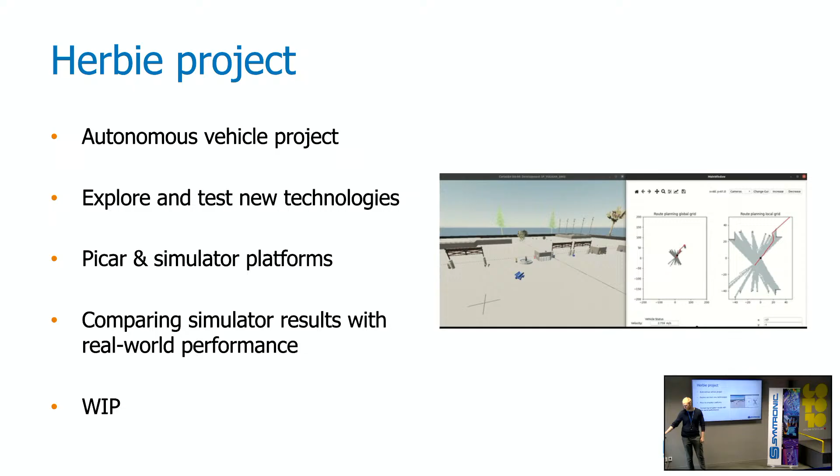So I'll do a slight overview here. We have a platform launcher where you can set the choice essentially, and we designed the project to be plug and play more or less to the specified platform you chose. We have AutoSAR standard applied as well. The platform launcher launches the different systems needed for the project - we launch a visualization package, a SLAM toolbox, a path planner, and vehicle control, among other packages that help communicate over the system. We use ROS2, and it communicates over Wi-Fi.

The Picar platform, we chose it specifically to be pretty cheap and challenging. This map is pretty challenging for the system we have. The LiDAR has a recommended minimum range of 10 centimeters, which is quite tough and challenging in this map. The vehicle dynamics with the servo we have is also quite challenging - you essentially need to max turn most of the turns to make it around. This causes us to be challenged with all the algorithms we use and really understand the methods we are applying.

When we went from the simulator and made this map and started using the hardware platform, obviously there's a lot of difficulties that arise when you have a real-time system. It arises because we had several issues - like we realized we had too low voltage because we initially had 2 batteries, and we had some sync issues as well because ROS2 is over Wi-Fi. We had to realize what message goes where, and in the simulator it was not as problematic. We found multiple issues like this, and it's interesting to see the difficulties that can arise when we go to the real world.

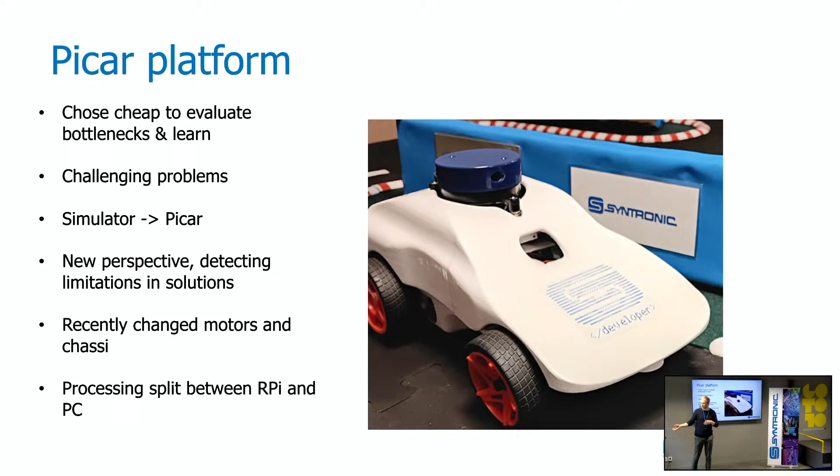The processing is split between the RPI on the car and a laptop, so we will be running it on this laptop here in the demo later. We're also using the simulator on the other side, and it's open source, based on Unreal Engine 4. We made custom maps and vehicles inside this tool.

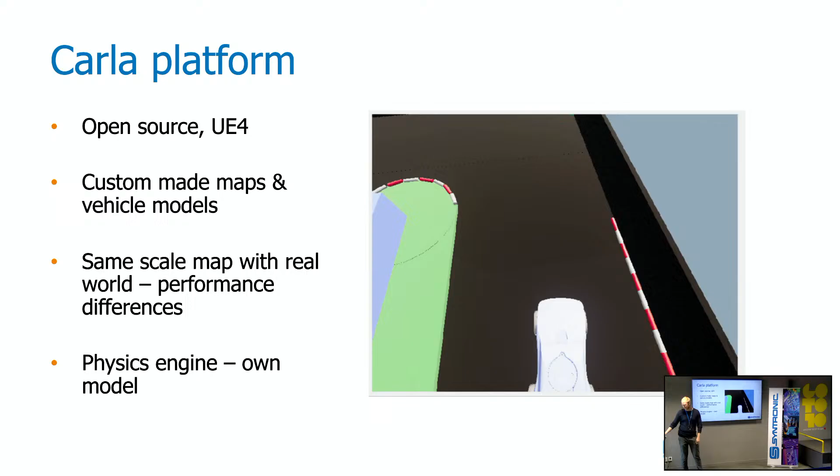We made a same scale map as this to really compare the results we see in the real world and in simulation - how much we can turn and these things, and see when the sensors are correct, or ground truth, in the simulator, how do we perform there, and we can compare these kinds of things. It was pretty fun to detect some issues - we made a model in CAD, then did animations in Blender, then exported it to Carla. It's interesting how the physics can work if you don't assign everything correctly. The first attempt was just the car flying around because the physics were not correctly set - an interesting process.

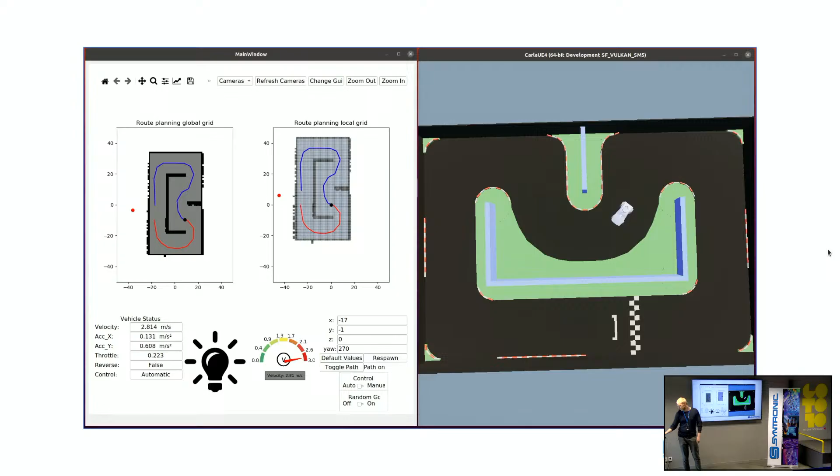So to make the map and understand the environment, we're using SLAM. SLAM involves localizing the car, and it needs the odometry to do that, so we use extended Kalman filter here, and then we do sensor fusion. We have a wheel encoder on the car that finds the small distance the car has traveled, and then we use the IMU to detect if there's a rotation happening. We fuse the 2 data and send it to the SLAM, and then it combines it with the LiDAR data to make the map.

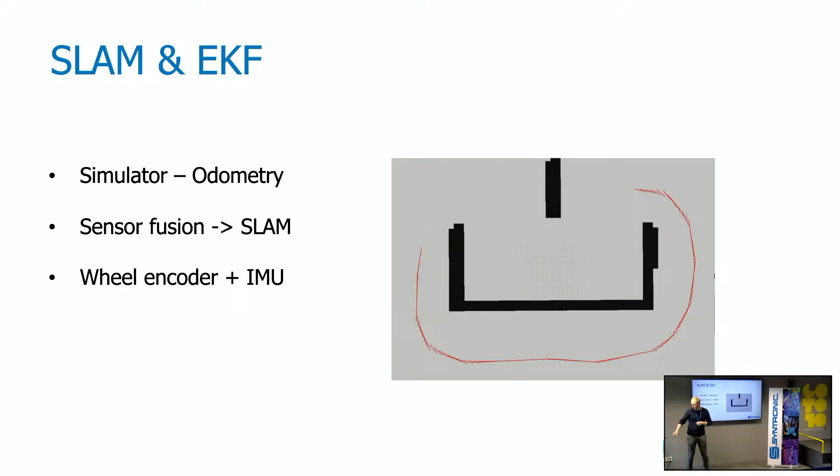For path planning, we're using Hybrid A*. It's a rather simple algorithm, and preferably, from our experiences, we didn't want to do too strict of a collision avoidance, because if you do a line of sight and follow the track like the path we have, you can forcefully remove paths that are too close to walls. Which could be good, but if you end up too close to the wall due to control error or following it and wanting to make a new route, then you would remove it forcefully. So penalizing being too close to the wall is a smoother solution, but you need some strictness - obviously you don't want to run into walls. It's a balancing act.

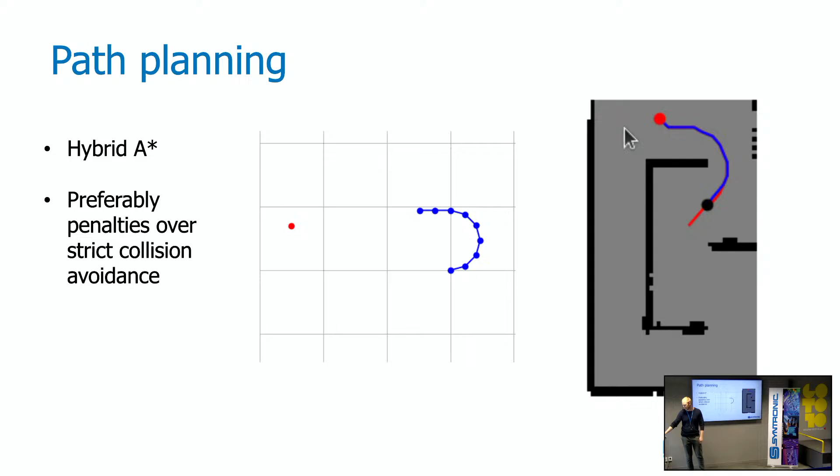So finally, I want to talk generally about some experiences in this project. This map was quite challenging for the system, in terms of turning and making a path that's easy or manageable to follow, because as soon as you make a slight mistake, you need to max turn more or less all the time. Having a very precise relationship between the car and the map we created is required.

We had some issues initially when we made the first iteration of the platform. We had issues with the voltage we found. We added 2 batteries and it should be fine, but it was kind of over the edge of what we could power with that. And then it has these hard, difficult hardware random issues - you drop the voltage but then go up again, and you don't really know exactly why the performance is going up and down and changing. So these kind of issues are interesting to find.

Initially, we just glued 4 magnets onto the wheel and made a wheel encoder with a Hall effect sensor, just to again challenge what we can do with the lowest amount of technology. But it was clearly too low resolution for us. We had timing issues as well with the IMU for the extended Kalman filter. But it was interesting, and now we changed to motors which have way more resolution, which is required for good localization.

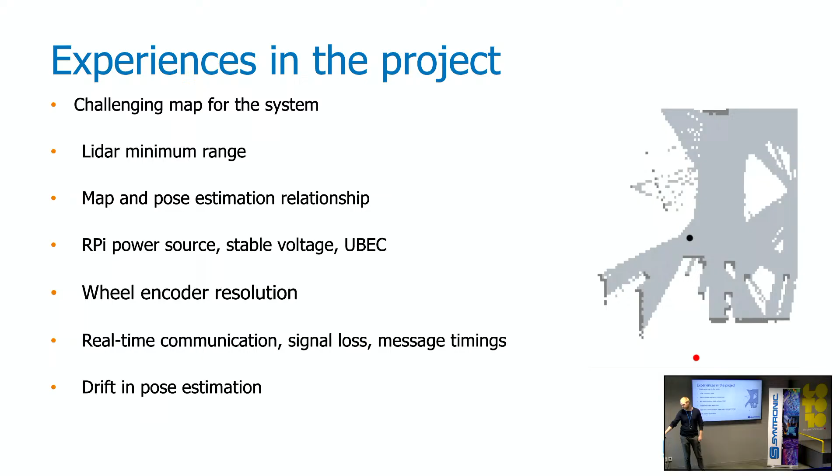With ROS2, we found some issues with signal timings and real-time timings for all of it, especially SLAM, and the localization needed really precise updating. Because of multiple of these issues, we saw some drift in the pose estimation due to signal loss, because we missed messages and this kind of stuff. Many issues going to hardware can be very challenging. But that was the short introduction of what we're working on right now.

Do you have any questions?